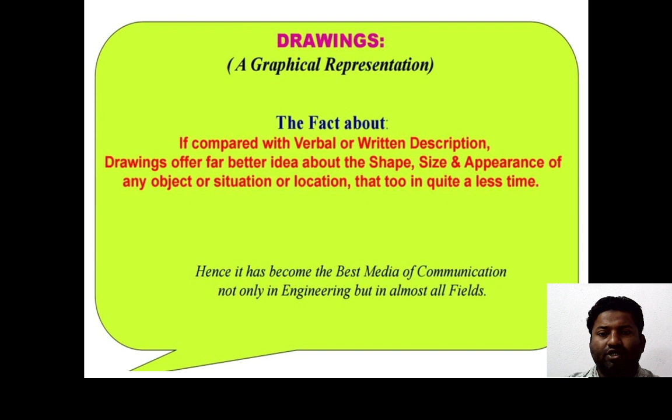A drawing is nothing but a graphical representation of any physical object. It is prepared based on certain basic principles, symbols, representations, standard conventions, and notations. It is a graphical language that communicates ideas and information from one mind to another and can be kept as a record of the planning process.

Engineering drawing is defined as a communicating language between two technical persons. Whatever diagrams we are drawing can be understood only by a technical person - someone who belongs to the technical field. Because of this, engineering graphics is also known as the communicating language between two technical persons, and it is called the universal language of engineers.

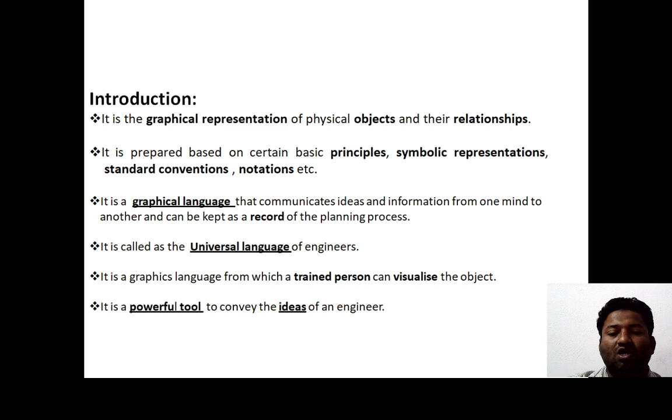It is a graphical language from which a trained person can visualize the object. It is a powerful tool to convey the ideas of engineers.

The purpose and requirement of studying engineering drawing - what is the purpose? Generally we discuss this. To develop the ability to produce simple engineering drawings and sketches based on current practice, to develop skills to read manufacturing and construction drawings used in industry, and to develop a working knowledge of the layout of a plant and equipment.

Students who belong to mechanical engineering will draw the diagrams of machine components. In the same way, civil engineers will draw the layout of a plant.

Next, to develop skills in abstracting information from calculation sheets and schematic diagrams to produce working drawings for manufacturers, installers and fabricators. Technical drawing is the language of engineers, without which the drawings of various magnificent structures or

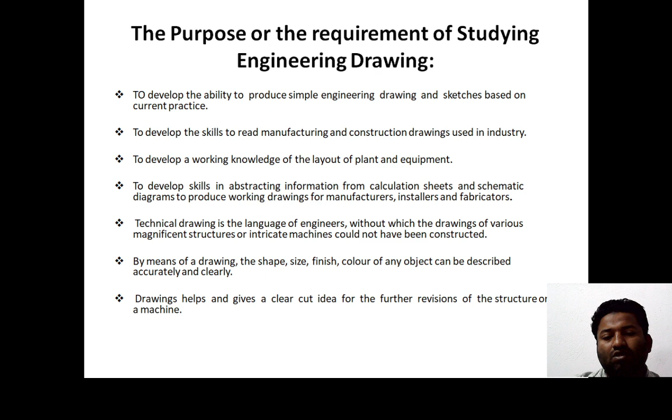intricate machines could not have been constructed. By means of a drawing, the shape, size, finish, and color of any object can be described accurately and clearly. Drawing helps and gives a clear-cut idea for further revisions of a structure or machine.

Now, engineering drawing. The instruments used in engineering drawing are: drawing board, drawing sheet, drafting machine, set square, irregular or French curves, compass, divider, protractor, ruler or scale, pencil, eraser, and drawing pins or clips. We will discuss each and every instrument in detail now.

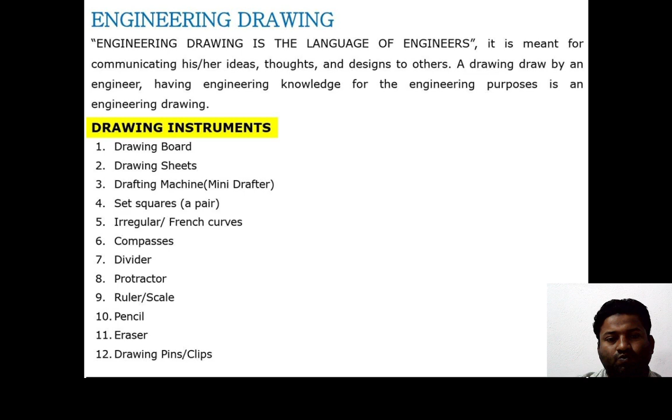First, the drawing board. If you see on the screen, the drawing board is appearing, as per the designation and sizes.

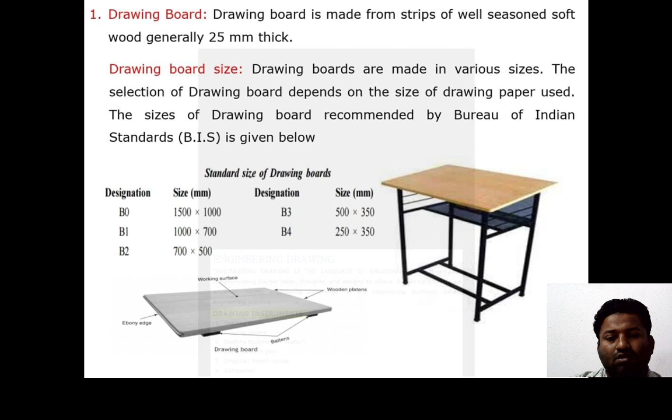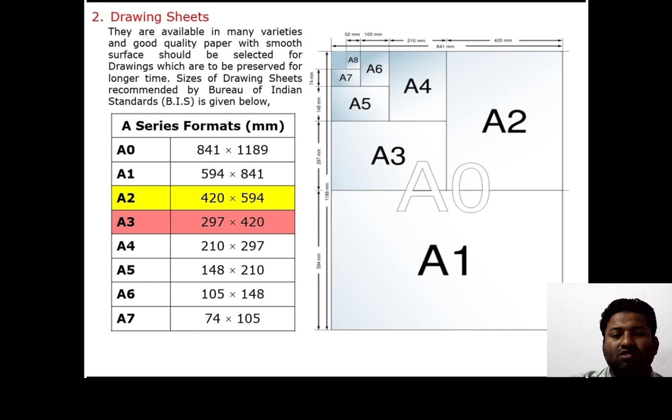Next, drawing sheet. The drawing sheets are available in the market as per the BIS A series. We have A0 to A7 series designations of paper, but in general we use either A2 or A3 size paper. The standard sizes of the paper are given on the screen.

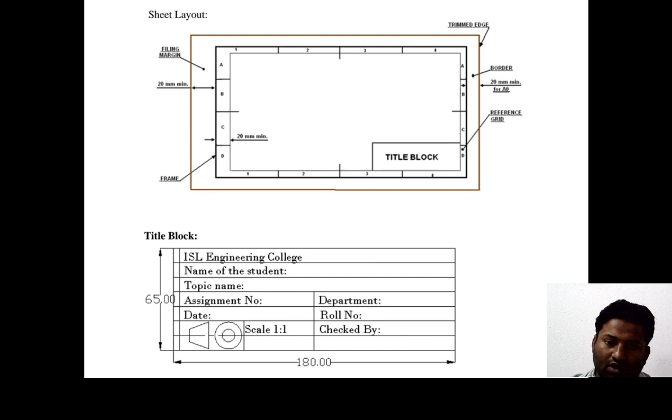So a sample I have given here. In the name I have given a college name here. The rest of the things we can fill up while drawing the diagrams.

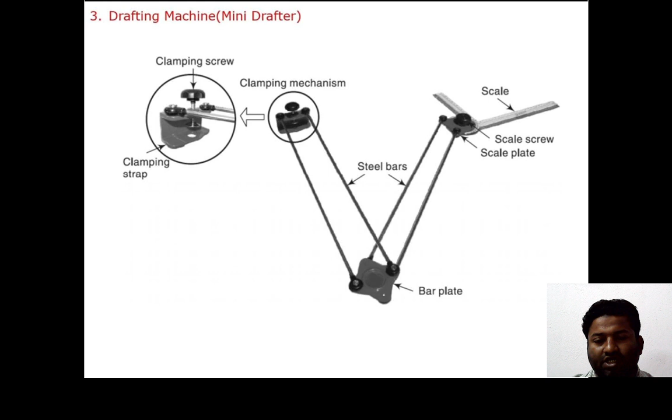The next thing we require is a drafting machine, also known as the mini drafter. You can see the image of a mini drafter on the screen, and the setup of the drawing sheet with the mini drafter on the table. How to clamp a mini drafter on a drawing sheet is shown in the figure in a step-by-step manner.

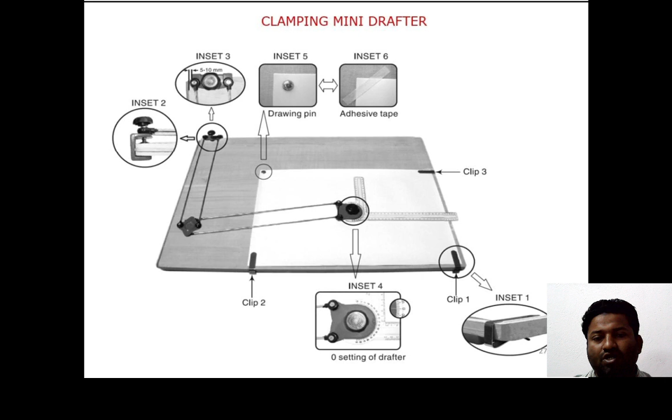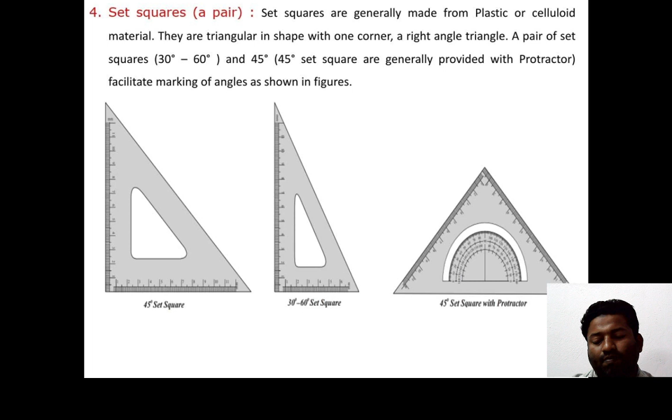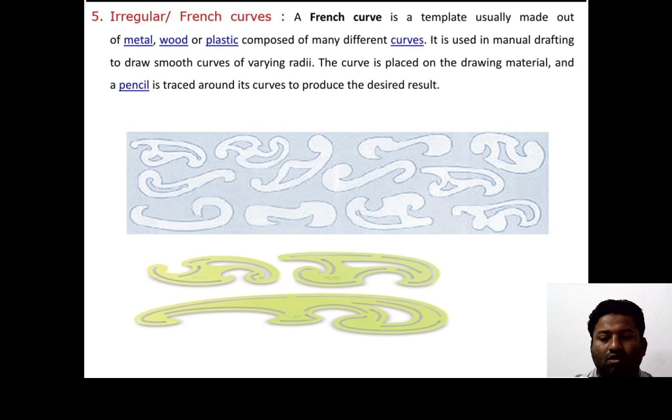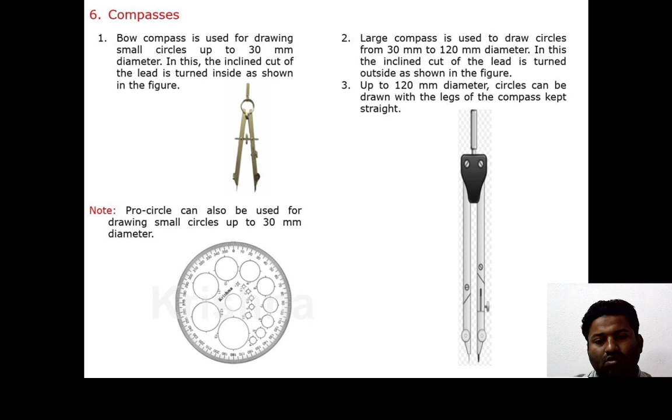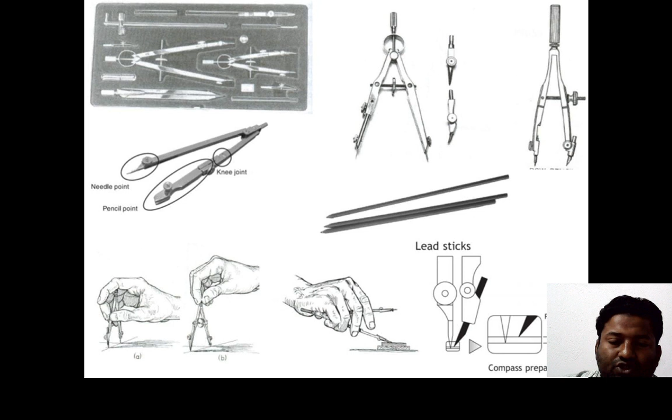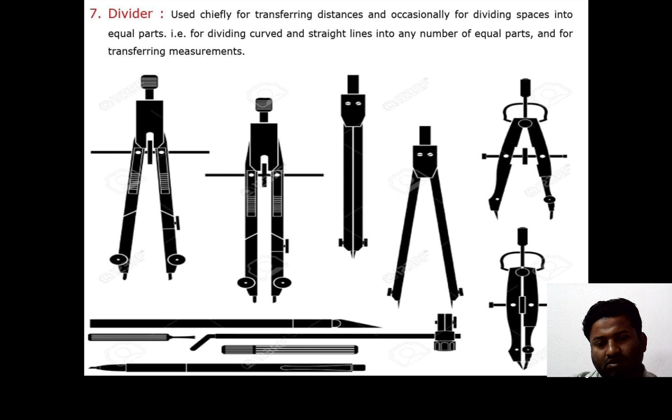Next, the divider. A divider is used to divide objects into an equal number of parts. The purpose of the divider is just to maintain or measure equal divisions.

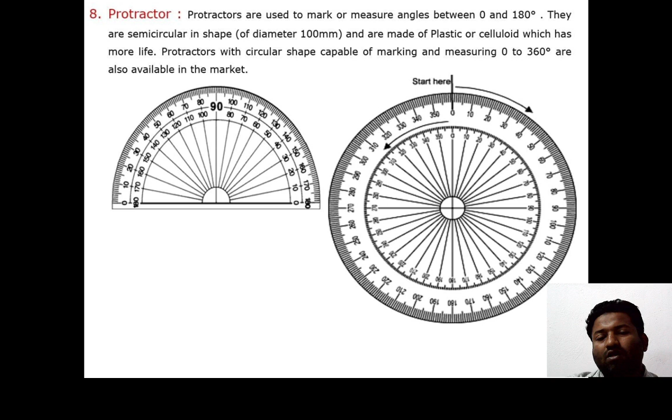In engineering practice, we use transparent protractors for measuring or marking the angles accurately.

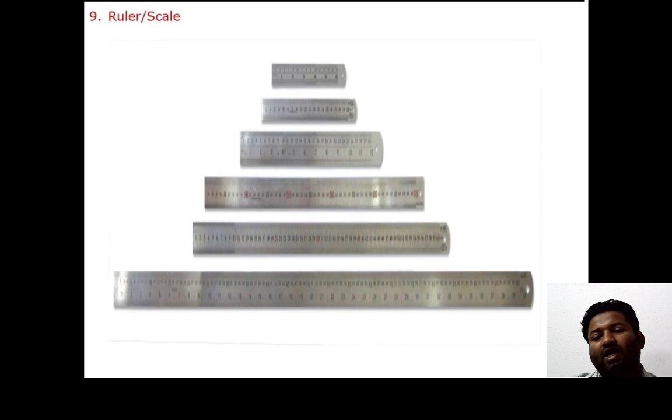Next we have a ruler or a scale. In engineering practice we use a transparent ruler or scale, but in the market it may be available as either a transparent one or a metal one. In general, especially when we draw diagrams, we use a transparent scale.

Now pencils. In engineering practice, we have different grades designated by numbers and letters. As per the grades, we use the pencils, either H pencil or HB pencil, as per the requirement. So in engineering drawing, we have different pencils for drawing the diagram, and their different purposes are given in the block.

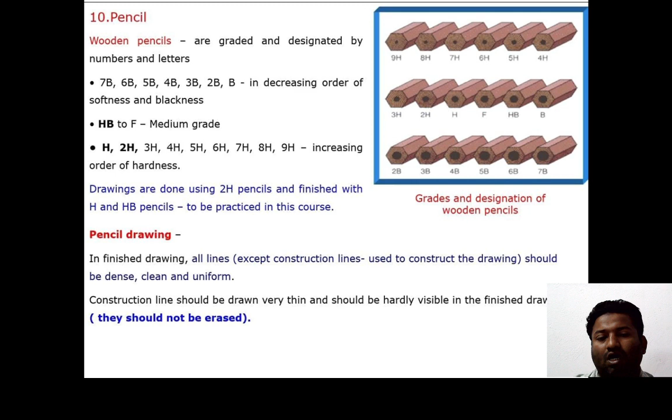We use different types of lines as per the requirement of the pencils and their application. The very first one is the thick line. The thick line is used for outlining visible edges, to represent the surface boundaries of an object, or margin lines. To draw this, we require an H pencil.

Next, we have a continuous thin line. The dimension line, extension line, section line, leaders or pointer lines, construction line, border lines or projection lines can be drawn using a continuous thin line. For this we require a 2H pencil.

Next, continuous thin wavy line. This is nothing but a free hand line; we can draw it by our free hand. It is used only for short break lines or irregular boundary lines. For this we require a 2H pencil.

Continuous thin line with zigzag. This zigzag line has a special purpose; it is used to break a long line. To draw this one we require a 2H pencil.

Short dash lines are used in the drawing wherever hidden objects are there, because it is used to represent the invisible or interior surface of that object. We can draw this with the help of the H pencil.

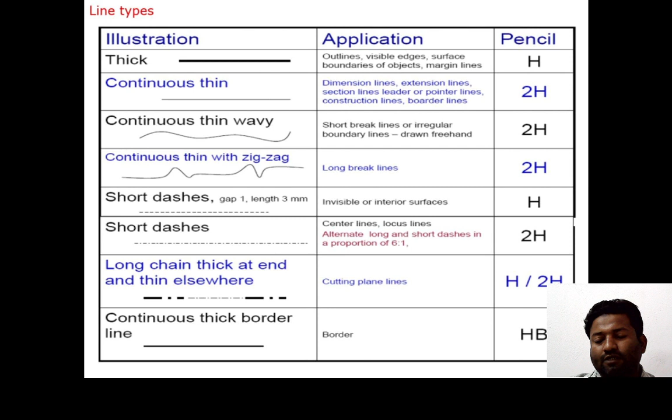Next instrument is the eraser. Wherever there are excess, irregular, or unwanted lines drawn by mistake, we can use the eraser to correct that.

Next we have the drawing pins or clips. The clips play a very important role in engineering drawing; they hold the drawing sheet on the drawing table.

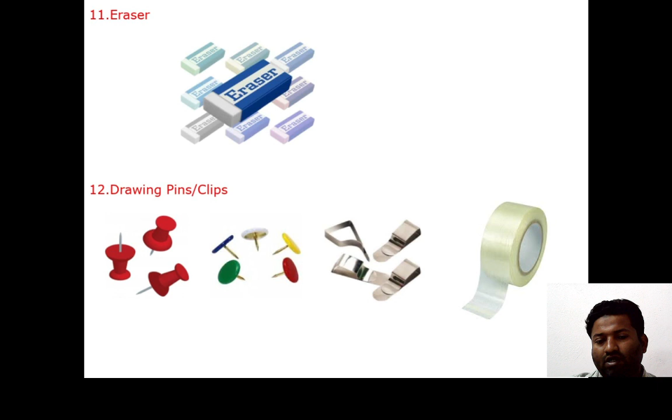Next we have another class, so we can discuss that later on.